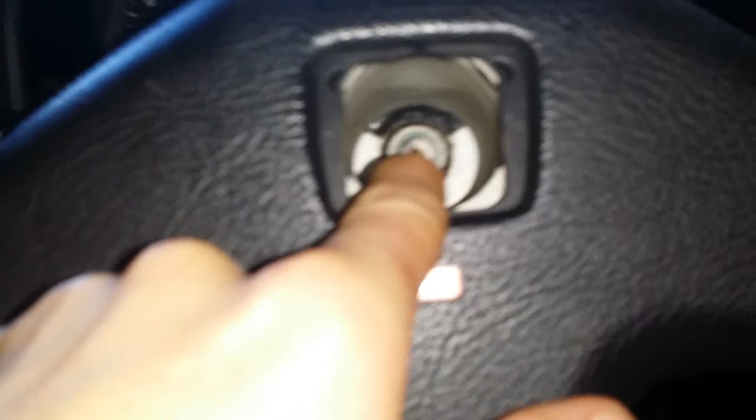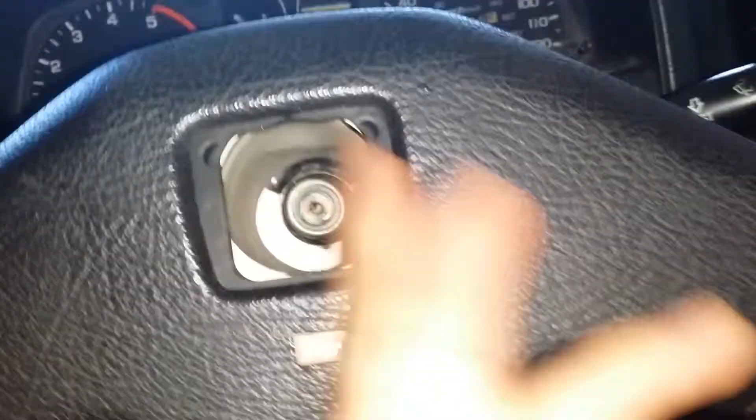For me to get it off, you have to pop this button off with a screwdriver. That, I think, is a 19mm nut. Undo that with a breaker bar. I have it locked with the key out in order to not have to hold the steering wheel. That's probably not a good idea, because it maybe even puts too much torque on the lock cylinder of the ignition switch. I got the whole entire steering column with the wiring harness and an extra ignition switch, so if this one goes bad, it's just a swap, which is fairly simple.

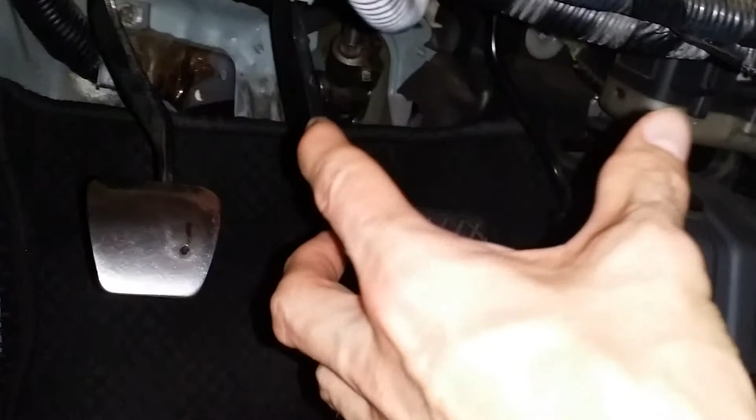Once you take this off, you've got these two switches. Here is one single unit with 2 screws in the top and bottom. That comes off. There's 3 screws to take this off, and then there's 6 attachment points under here, along with wherever that knuckle is down there. And also there's the plastic that goes around in a couple of clips. I had spray painted my clips just to make them look nice, and they actually held up. Did that a couple years ago.

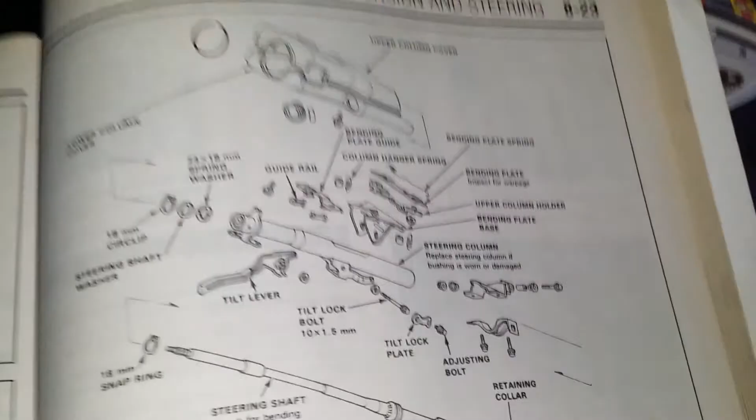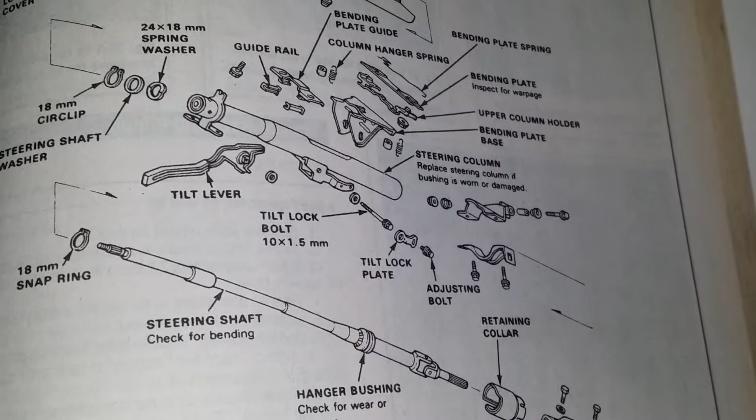So what I did find, because suspension and steering is in the same chapter, I happened to find an illustration of this in my Chilton's manual. And what I found was there's a tilt lock plate and adjusting bolt. I'm really hoping that I have that on this column, and I have no reason to suspect otherwise. And then you can actually see here...

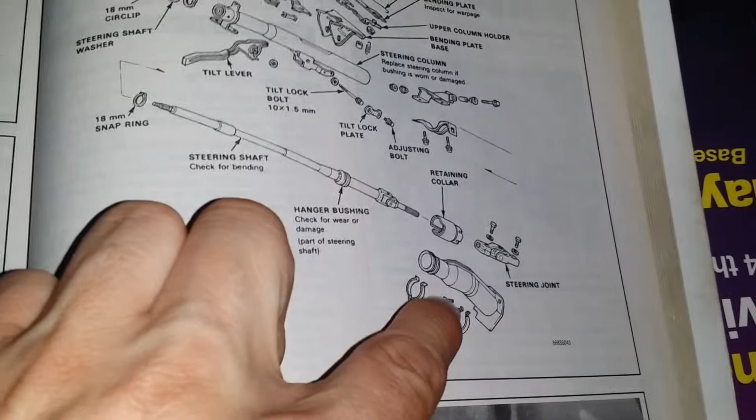So you'd end up taking off those 2 clips I just showed you. There's a plastic push pin you pull out, and this whole plastic cover comes off. It's split down the back, and it's probably somewhere down on the floor.

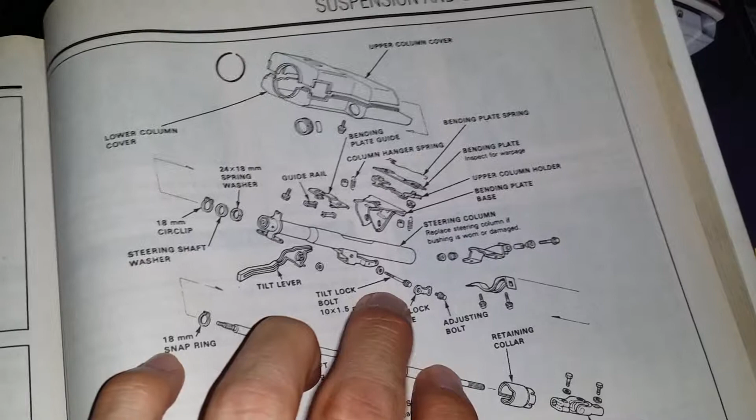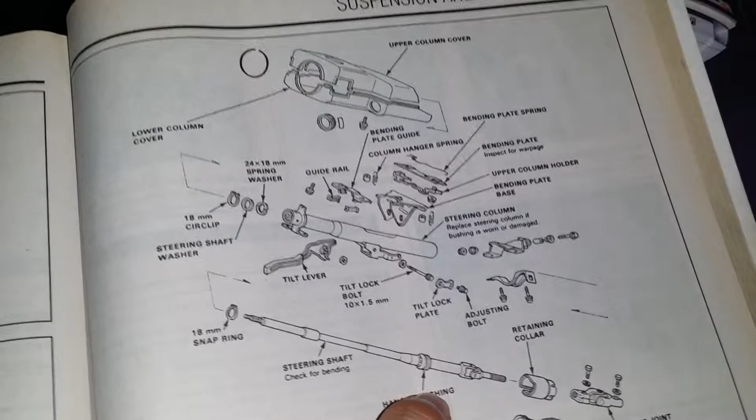And then you've got 2 nuts here and 2 bolts there, and I'm pretty sure 2 more here. So there's 6 total, and that's about all you really need to do. They don't show there's a screw here and a screw down at the bottom, and that's for the switches that go on there. They don't show that on this one for whatever reason.

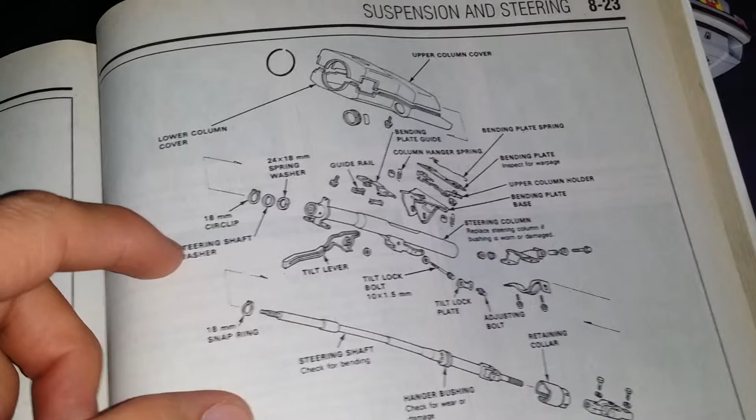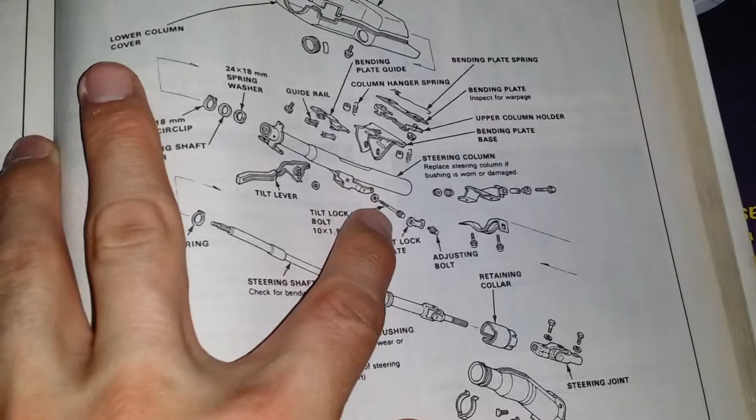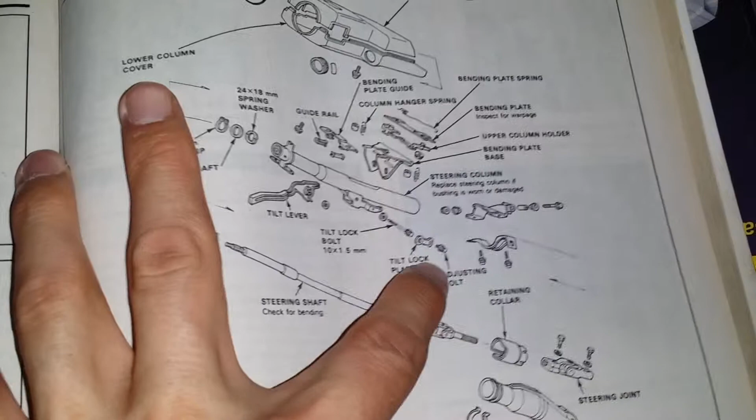So anyway, and then steering joint, that's what that's called, I guess. I'm hoping that whoever had the car before it hit the junkyard had adjusted it very high. I guess I'm just going to back that off, or this one off, and adjust it. I don't know if I can see up in there or not.

I don't know where that's at, unless that's it right there. Yeah, that looks like what I'm looking at. Come on, focus.

So I'm thinking that's the adjusting bolt right there. And then I don't know what that is. But maybe that's a nice weld. Maybe I will finally solve my problem on this. So, now that that's done...

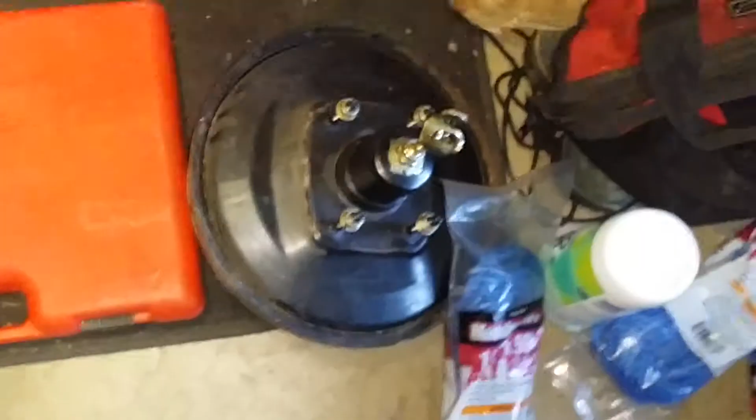This is the brake booster from the Integra that accepts a 1-inch master cylinder, and that may or may not go on. I may just upgrade to a stock 5th generation Civic master cylinder, which would increase it by 1/8 of an inch diameter, going from 13/16 to 15/16.

I used the crow's foot on these, and they broke free. I used a breaker bar, I think like an 18-inch, 3/8 diameter, and just bam, gave it a quick hit and broke it free. That sucker was on there.

I don't know how to get rid of these clips. I know you gotta slide them out, and probably push down on here. I'm sure there's a simple maneuver to get these off, but I'm not very good at it.

See the original color here. You can also see the original color up there. Yeah, anyway.

So this isn't going to be hard to get off, but this probably is, and I'd like to get this off without damaging it. I think you're supposed to replace these clips anyway, but I prefer not to buy them if I don't have to. They could be a little pricey, but I doubt it—probably just $1 or $2.

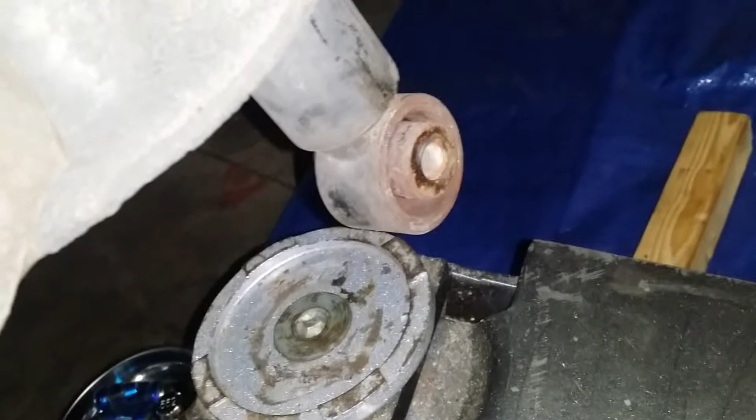I took the shock out of the top, removed these 2 nuts, which I will put back on right now, and removed the bolt out of the bottom. That's a completely different base versus the other shock or strut that I have.

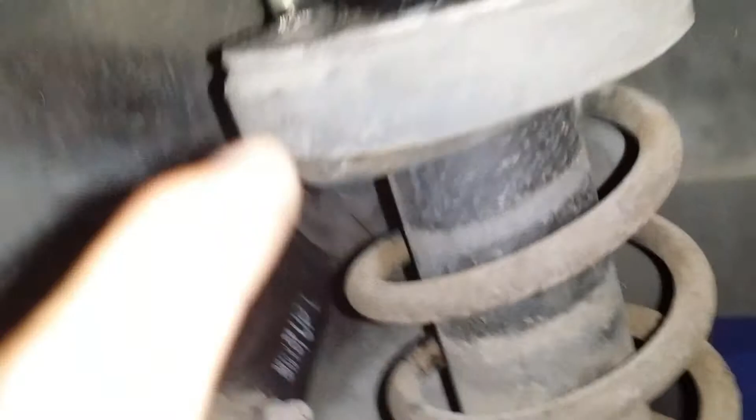I have the compressor for this, but I cannot get this out because it will not clear the wheel well without me pushing down on this somehow, or detaching it. So I'm probably going to detach it here.

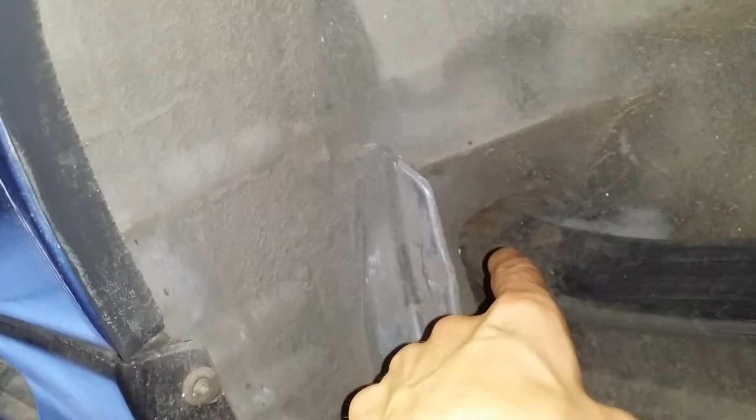But you definitely want to break these bolts free up here, up front. I learned that when taking these out of the junkyard—you want to work your way back. So I'll probably break those free before I start to remove these, and I'll probably even break these free as well, or maybe not, since I've got an impact compressor here. I'm not going to worry about those.